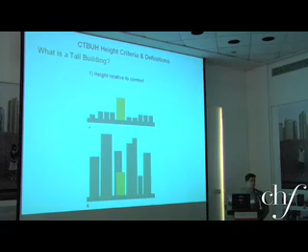And I'll tell you the three things. When I talk about we, I talk about the organization that I'm the executive director of, the Council on Tall Buildings and Urban Habitat, which has been in existence for 40 years and is based here in Chicago at IIT. We consider three aspects when we're looking at what constitutes a tall building. The first is it's not just about height. It's about height relative to context.

In some cases, a 15-story building may not be particularly high in this city, for example, but in suburban areas or in provincial cities in this country and other countries, it is particularly high. So it's not just about height, it's not about feet above ground, it's about height relative to context. The second is proportion.

It's not just about height, but it's also about the size of the building relative to that height. So we can have some towers or buildings which are not particularly high, but they're very slender, and these could be considered tall buildings. I think a good example is just along the river here, the Merchandise Mart, which is an absolutely massive building in mass. And when it was built, it was actually quite tall. But it's not typical of a tall building because its mass is bigger than its height.

And the third criteria that we look at are the technologies that are employed in the tall building itself. If these technologies are specific to tall buildings, it could be elevatoring strategies, it could be wind bracing, then this is another factor that leads us to conclude that the building is a tall building. So, sorry, I should have explained, any building that fulfills any of those three criteria to us could be a tall building.

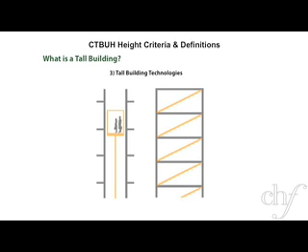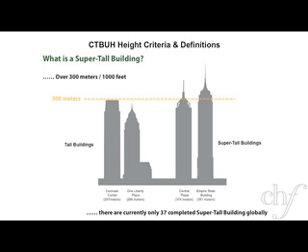What is a supertall building? Very easy. It's not a building that exhibits some element of super tallness. It's a building which is over 300 meters or 1,000 feet in height. So we do nail that down with definitive criteria. And just to put this in context, at this moment in time, there are only 37 buildings in the world that are supertall, that are completed and occupied today, only 37 buildings which are over 1,000 feet in height.

Now, it would be very amiss of me to come here and talk to a Chicago audience about tall buildings, and I can see people smiling in the audience already. One of the things that my organization does, we are the arbiter on tall building height and the body that says which is the world's tallest building or not. And some of you, if not all of you, may remember a situation about 10 or 12 years ago where the title of the world's tallest building was awarded to Petronas Towers in Kuala Lumpur over the Sears Tower.

And although I just want to say for the record that I was not involved in that decision, because I was far too young at that time, I just want to explain some of the reasoning behind that, because I think it's fair to say it surprised us the amount of interest that decision had, both in Chicago and around the world.

The main reason is this. The antennae at the top of the Sears Tower were not included in the height of the building, as opposed to the spires on the top of the Petronas Towers. And the reason for this is that the spires were always considered an integral part of the architectural vision behind that building. So it was never expected that those spires would ever be taken away from the building.

Now, over the past 30 odd years, the antennae on top of the Sears Tower have obviously become synonymous with the iconicness of that building. However, they were there for one reason and one reason only. They're a piece of telecommunications equipment. They were never part of the integral initial architectural idea.

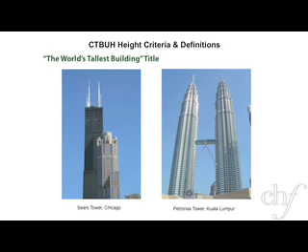And in actual fact, a decade or so ago, there were big discussions involving lots of people about this. When it's linked to technical equipment, of course it can be taken away depending on the changes of technology. So that's why it was not considered in the overall height of the building. You can make your own minds up whether you think that was a good decision or not, but that was the reasoning.

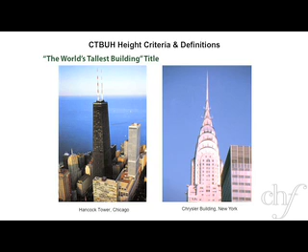And there's another two examples there where, whether you agree with the decision or not, you can see that there is a difference between something like the Chrysler building, where that spire is an integral part of the architectural vision, and something like the Hancock, where it's functional technological equipment which is placed on the roof. Of course, in the 10, 15 years since then, there's been a lot of examples that are not as black and white as the issues I'm showing you today.

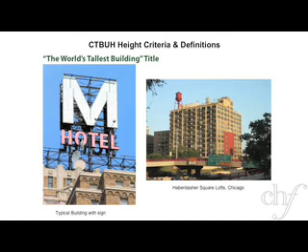But just to extrapolate that, where do you stop? If you do start to count this stuff that's plonked on top of buildings, where do you stop? Signage, water towers, satellite dishes, where do you stop? And so all I want to get across to you today is that there are a lot of factors that were considered in this decision that perhaps on the face of it might not have made sense, because the iconic antennae on top of the Sears were higher than the spire on Petronas.

As a result of that discussion in the mid-90s, we created 4 criteria, although this tended to get overlooked, to reflect the changes that go on at the top of buildings. The first category is the height to architectural top. And it was this category that became the leading category for the tallest building in the world, city or country. However, we created 3 other categories. And by the way, this diagram shows the 5 tallest buildings in this category today, Taipei 101 in Taiwan being the tallest building completed and occupied today.

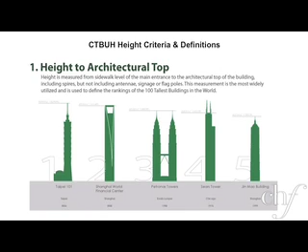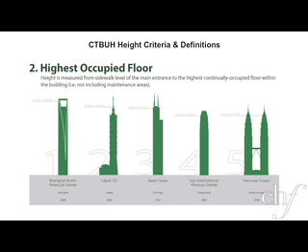The second category was highest occupied floor, i.e. at what height above ground can you put man or woman in a permanent working capacity, permanent access, as opposed to a mechanical room or a lift machine room. And the tallest occupied floor at the moment is the Shanghai World Financial Center, which was completed about 3 months ago in Shanghai. That is an observatory at the top level, which you'll see is significantly above all the other buildings.

The third and least glamorous is height to top of roof. And the fourth, and hopefully this will please a lot of people in the audience, is the height to tip. What this category is recognizing is, irrespective of whether it's signage or antennae or spire or whatever magical thing the architect may say about it, this is measuring man's ability to put material at the highest point above the plane of the earth.

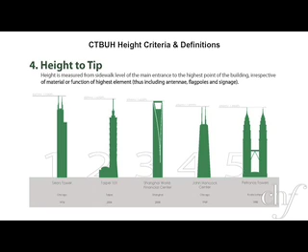And hopefully you'll be pleased to see that the Sears Tower at this moment in time, in terms of buildings, is the highest occupied floor in a completed building. We do make a distinction between buildings and towers. Buildings require people to become buildings, as opposed to telecommunication towers, where the vast majority of the height is actually occupied by non-people directed space, or no space in a lot of cases.

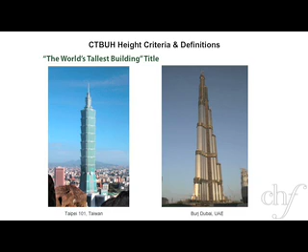So that's the world's current tallest, Taipei 101. The world's current tallest under construction, and not far off completion, is the Burj Dubai. And I'm going to talk a little bit about that in a moment or two. Just to finish on the criteria,

mixed-use buildings. There's a lot of interest around the world in this change, which I'm going to show in a minute, towards mixed-use buildings. And any architects in the room may know that there's a lot of people who put a restaurant at the top of a building and a shop in the bottom and say it's a mixed-use building, which of course it's not. And we define mixed use.

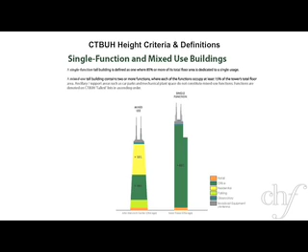For a building to be mixed use, a minimum of 15% of the total floor area needs to be an additional use. So it's 2 or more uses, with any one use being 15% or greater before it can be accurately defined a mixed-use building. And that's the criteria that we use.

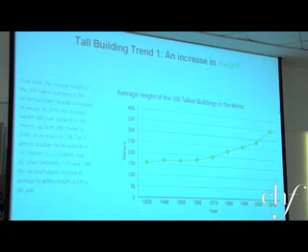Okay, I now want to talk about some of the trends in tall buildings that have occurred in the past 10 to 20 years. First of all, we can say very clearly that there has been a massive increase in height of the world's tallest buildings and tall buildings generally. And this diagram is the average height of the 100 tallest buildings in the world, which you will see going steadily up and up each decade.

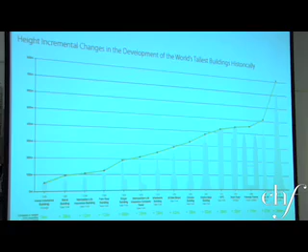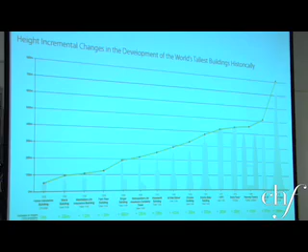And the Burj Dubai will be almost 1,000 feet greater than the Taipei 101. It will be 60% taller than the Taipei 101 building. And you can see it there, and it's not complete yet. And there's a lot of things that are incredible about this building. Just in pure height terms, we could, and of course maybe we shall, have a conversation about whether it's appropriate on sustainability grounds and others.

But in terms of pure height, this is the first time in the history of mankind that the world's tallest building will be predominantly a residential building. Every tallest building in the world has always been an office building. And as you can probably imagine, an office building usually relies on a large floor plate, a large floor area. You know, your typical office, you want to step out of a lift, an elevator, into as big a wide open plan space as possible.

Whereas a residential building is usually a much smaller building because there are less people per floor. It's more cellular spaces. And so the thing about this building is not only its great height, but its slenderness ratio, its proportion. Because for the first time we're seeing this massive height, but we're also seeing a much smaller floor plate as it steps in towards the top, such that it really does look like a needle standing up on the Dubai skyline.

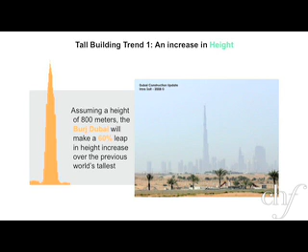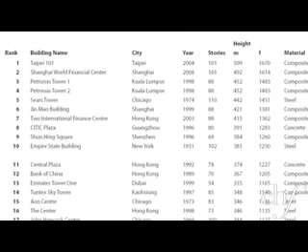This will be the tallest 30 buildings by 2020. These are the ones we know of. So you will see Taipei 101. Sorry, actually, this is before 2020. This is approximately 2012, maybe. But Taipei 101 has now dropped down to 11th on the list.

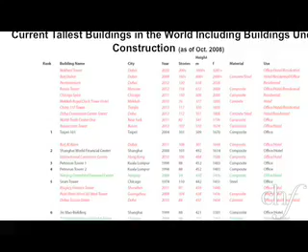It's got the ranking of 1 because it's the tallest now. And the Empire State Building is nowhere to be seen. Nowhere in the top 30. Let me jump to this. This is easier to take in.

This is what we call the tallest 20 in 2020. This will be the tallest 20 buildings in 2020. And these, by the way, we have strict criteria for these. These are what we call real proposals. And by real proposals, we mean there's a site, there's money, there's a developer, there's a full professional team, there's planning consent. This is not just a hypothetical proposal.

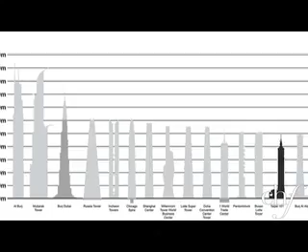That doesn't necessarily mean they will all be built, of course. But the intention is that these are real proposals, and there is a full team currently working it up. And they're often on site. So the Chicago Spire, which I suspect we may mention during this presentation, is also on this list. But the ones in dark color there are the built ones. The ones in light color are out of the ground and are already well on the way.

And the interesting thing is Taipei 101, I think, is going to be 16th on this list, and things like the Empire State Building are nowhere to be seen. So this is the thing. Irrespective of the credit crunch, irrespective of the hundreds of proposals that we see every month that are not on this list, i.e. the hypothetical proposals, we can say quite safely that we are in the midst of a tall building boom, the likes of which the world has never seen, both in great height and in numbers of tall buildings.

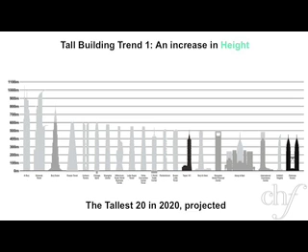The last part of the 19th century in Chicago, there was a great boom in tall buildings. In Art Deco New York and Chicago, there was a resurgence. In other periods in the 80s and 90s in Asia. What has happened in the last 10 years is that there has been a boom across the whole globe. And Lynn and her work at Chicago Architecture Foundation, some of the exhibitions that they've shown, has portrayed that. Everywhere, Australia, Asia, Europe, traditional cities in Europe which have been anti-skyscraper. Some cities in my country like London. Just a few weeks ago, Paris even announced that they're now considering tall buildings built in the historic centre of Paris.

There has been a massive boom in tall buildings. Whether all these are appropriate or not, we will get onto. Great increase in height, a great increase in number. As I've said, there are now more tall buildings in Asia than there are in the whole of North America. Think about that. 40 years, more tall buildings built in the whole of Asia than were built in almost 130 years plus in North America.

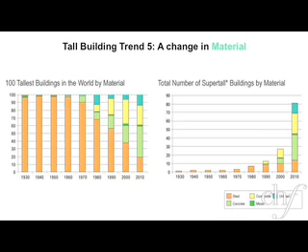He says, and some of you may have heard him say this, if you'd have predicted the world's tallest building 30 years ago, you'd have said three things safely. You'd have said it'll be in North America, it'll be an office building, and it'll be built of steel. And now the exact opposite is true. It'll probably be built in Asia or the Middle East. It'll be residential, and it'll be built of concrete or composite structure.

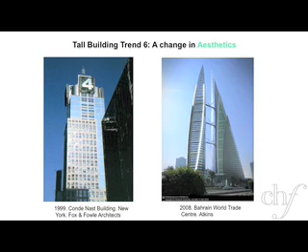And the final trend that we're seeing is this change in aesthetics, and we're going to talk about that in a little while. This change in aesthetics for tall buildings. So what's driving it? Those are the figures. What is driving this? Well, I think there are a lot of drivers, but I pick up on just four here. Some I think which you'll be familiar with, and some perhaps not, just to throw out there my thoughts.

One is land prices, always been a driver of tall buildings. Price of land in the city and the desire from developers and others to exploit to the maximum the price of that land in developing into a tall building. So that's one of the drivers. However, again, the world has changed, and tall buildings have always been used as icons. They've always been icons, and they've always been used by corporations predominantly for prestige.

But something's changed in the past 10, 15 years, and these are no longer just about projecting the prestige of corporations. They're now about projecting the prestige of cities and countries in a global competitive market around the whole world. And you can see it in the titles of the projects. They used to be Chrysler Building, Chicago Tribune Tower, Sears Tower. Often the titles outlive the companies by decades. Sorry, that wasn't meant to be political. But now they're not. They're called Burj Dubai, Taipei 101, Chicago Spire. They've taken on a new agenda.

And the agenda is that these buildings are being used to say, hey, we've arrived. We're a first world country, often for developing countries. And back in the West, these cities are saying, well, we arrived a long time ago. We kind of slept for a while, and now we've arrived again. And city governments and often federal governments buy into this in a big way. They're now about branding cities as much as they are about branding corporations. By the way, I'm not saying this is good or bad at this stage. I've got very strong opinions on this, but I'll let you make up your own minds.

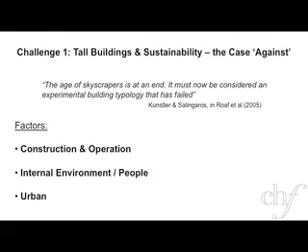Before I tell you about the positive sustainable credentials of tall buildings, let me say there are very strong feelings around the world that in a lot of cases tall buildings are not suitable at all. When I mentioned the Paris thing, there was a visible reaction from the audience, which to me is normal, coming from London and various other places. Certainly we as the council do not advocate saying tall buildings are the answer to everything everywhere. What we're saying is if you're going to do a tall building, you should do it to the best that you can, and that's what I'm going to touch on today. But there are many people who think they're terrible and anti-environmental.

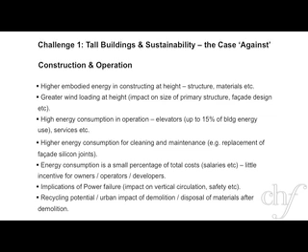The embodied energy, for example, in gathering these materials together and putting them up in the sky just doesn't justify the act of doing it in the first place. And the energy expended in elevators, lighting, and all these things make them anti-environmental. There are usually three areas these people draw on: during construction and operation, the internal environment they create for people, and the impact on the urban realm in terms of overshadowing, right to light, things like that. I'm not going to dwell on this, but there's a whole list I've put together of why tall buildings are anti-environmental, and you can ask me for this later if you want to.

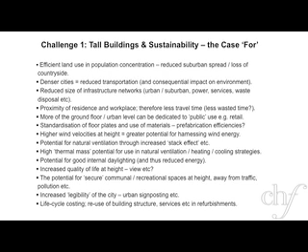However, one thing I do want to touch on is why we at the council believe tall buildings are an important solution for sustainable cities of the future. And rather than dwell on the negative, let's dwell on this.

I think it's generally recognized, and I mean no disrespect here, that the American urban planning system, which the UK has adopted comprehensively, is not the way forward for cities of the future. That is, we'll build a dense downtown core and stick our offices there, but we can all go off and live on a quarter-acre block out in the suburbs. I think most people think that's not the way forward. The loss of greenbelt, the ever-increasing infrastructure, the transport networks—this diagram shows why.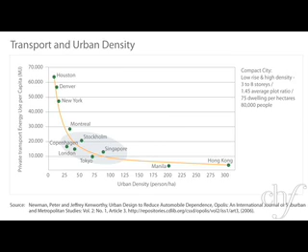Now why is that relevant? Well, that's relevant in countries like China and India and other developing nations seeing millions of people moving from rural to urban every year. Figures have been done to show China needs a new Chicago, something like every 8 months, to house its rural-to-urban migration. Where do these people go? By the way, those figures might not be 100% correct, but the sentiment is correct. So where do these people go—into the American model of a dense downtown working core with an ever-expanding suburb? Or into denser, more sustainable work-living patterns? But it's not just about places like China and India.

Changing social demographics in countries like America and the UK are also a result - by changing social demographics, I mean people are living longer, divorce rate is up, single-family households. In the UK, we need 200,000 new homes every year for the next 10 years to cope with this, not because of increasing population growth, which is more or less static, but because of the increased homes that are needed.

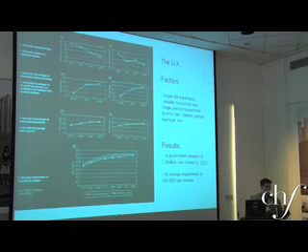Where do these homes go? That's one of the things that we're advocating: denser cities, which doesn't necessarily mean tall buildings, but tall buildings can be one part of the solution. One thing we feel quite passionately about is that tall buildings have an opportunity to show the way for the greater good of the built environment as a whole.

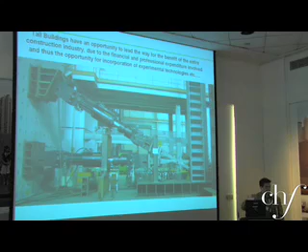This slide, though it might seem a bit obscure, shows that. It's a testing rig put up to test one piece of structure for a building in South Korea - a piece of structure that was probably going to be repeated 500 times in the building. Because of the size of a tall building, it has both an economic and a professional investment in it, which allows it to embrace experimental sustainable technologies and testing that smaller buildings don't have.

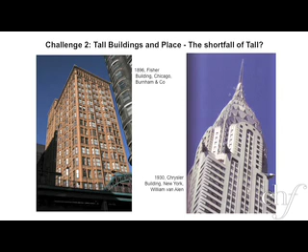Now this is where I start to get really passionate, because this is the second challenge of tall buildings - what I call tall buildings and place, the shortfall of tall. I often start my presentations here with a statement I hope nobody will be offended by: I actually think that 99% of tall buildings around the world are really poor pieces of design. And I'll tell you why - because they follow one of two design approaches.

They're usually the vertical extrapolation of an efficient floor plan, i.e. the commercial model, or they are designed as a piece of sculpture to be beheld in the city, much as you'd design a piece of sculpture to sit on a mantelpiece or a table - this iconic approach. And although the iconic approach can lead to more interesting tall buildings, the problem is this.

When the relationship between a tall building and the city is purely a visual one - i.e. I'm here, I'm beautiful, look at me - then that building can be picked up and plonked anywhere around the world. And what architecture generally, but tall buildings specifically, are doing is homogenizing world culture. Cities are now getting more and more like each other because they're gauged through a series of imported icons.

This is something I feel strongly about, as an architect but also as someone passionate about foreign culture. I've lived and worked all around the world, traveled in 50 or so countries. I travel to countries because I'm interested in the differences between places, not the similarities.

And it offends me when I see tall building competitions pop up in, let's say, Chicago, and a tall building is unsuccessful, and then I see the same building pop up in Moscow, or Dubai, or Sydney, or London. I think architecture has got to be more than that.

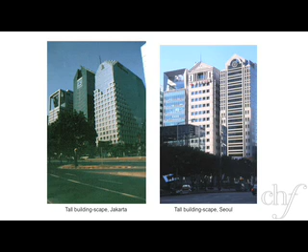And in the cities that I've lived and worked out in Southeast Asia, this is how it translates. Air-conditioned rectilinear boxes, 99% of tall buildings, with some fun and games at the top and fun and games at the bottom. The building on the right-hand side, actually, better image, Bangkok. I lived in Bangkok for 2 years.

What has postmodern architecture, with a root back to, I guess, somewhere along the way, the heart of Greece or Rome, got to do with Thailand? I find this extremely offensive, but believe me, this is a large part of the normal tall buildings that are built out in Asia and other places.

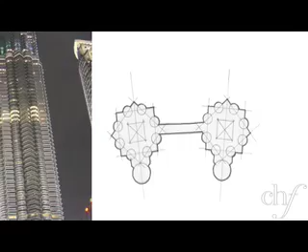Now, Cesar Pelli, who designed this building, was inspired by Islamic geometry in the plan form, and that's why I show the plan form on the right-hand side, the Islamic star. But then he extruded what I think is mostly a Western tower from this Islamic plan form.

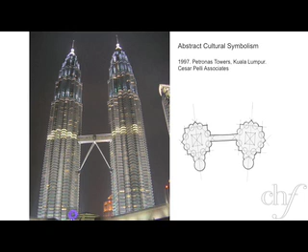It's still that same language of steel and glass. And ironically, just a couple of miles from this building is another building which is inspired by exactly the same plan form, but designed by a local architect. So it's the same plan form. But the architect didn't stop with the plan, because nobody understands a building in plan. You understand how it looks and how you move through the spaces. You don't understand it as a two-dimensional drawing.

What the architect did was extrapolate into three dimensions and carry on this Islamic tradition where the materials were used to create this brise soleil, or fretwork, on the outside of the building, which also shielded the curtain wall, which was then set back in from the skin of the building. I think this is an excellent example of what I would call a vernacular skyscraper, a building that is born of its place. So I just want to chart briefly what I call the rise of an environmental conscience. Buildings that are responding to environment and place.

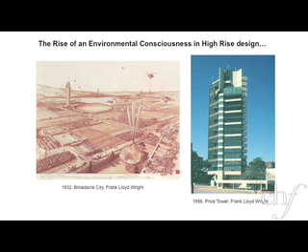And you know, we could start anywhere, but I start with Frank Lloyd Wright. This building was pretty much a disaster in any other way than aesthetic. And you know, Frank Lloyd Wright is a hero of mine. I live in the heart of Oak Park. I can see six Frank Lloyd Wright houses from my windows. This was his only real tall building, and it was a disaster in many respects in terms of its functionality. It mixed office and residential on each floor in a relatively small floor plate.

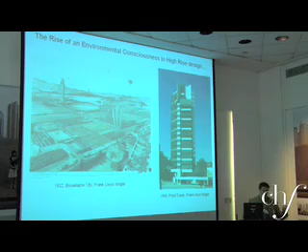But for me, it was interesting because Frank Lloyd Wright didn't believe that the skyscraper belonged in the city at all. He believed that they belonged out in the suburbs where they could be beheld, where they could be beautiful objects. But another point behind his rationale was, rather than go for this suburban model of everyone living on a quarter-acre block, put them up in higher-rise towers so that we can preserve the land. Now, there are obvious social connotations to that, but it was an interesting approach. So that's why I start here.

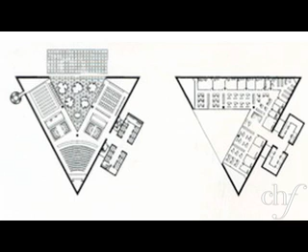Because this is a building which shields the sun through this stone facade and inverts the curtain wall, the glazing, to the inside through a series of sky gardens which step up, which hopefully you can see in plan there. These are a series of sky gardens, and this is the glazed facade, so people still get this view out, whereas the outside of the building is predominantly stone.

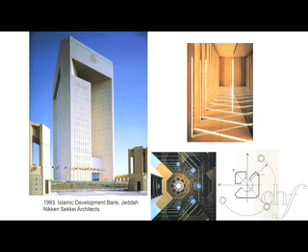I think there are lots of great examples in the Middle East of tall buildings that are not just constructed in stone. And I'm going to speed up a little bit because I want to show you something else towards the end here. But there are others that have done it. Harry Seidler in Australia, Charles Correa in India, that are trying to create something which is really born of place.

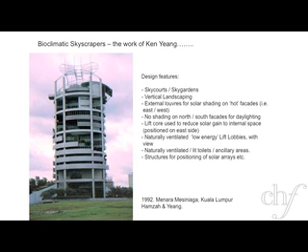And probably my biggest hero is an architect called Ken Yeang. Obviously someone's aware of Ken Yeang. Ken Yeang is a Malaysian architect, and I'm very pleased to say a friend of mine as well. And for the past 30 years, he's been doing what everybody else has been talking about in the past 5-10 years, developing green skyscrapers. And there's two people that have really been doing it, Ken Yeang and Norman Foster. Norman Foster has also done some excellent tall buildings, but there's a major difference between the two.

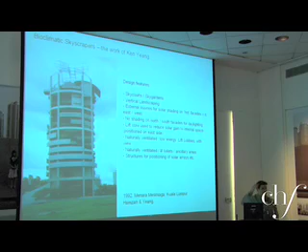Norman Foster's palette of work is still that high-tech, modernist ideal of steel and glass, whereas Ken Yeang has really striven to create buildings which create a new aesthetic. And that's really the thing that I'm most passionate about. This situation that we're in with climate change, we've got an opportunity to create tall buildings that are born of our age, that look different to the last 50 years of steel and glass. And that's what I'm passionate about.

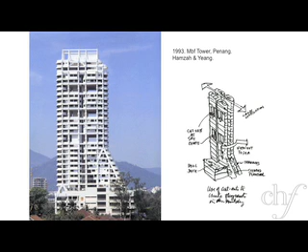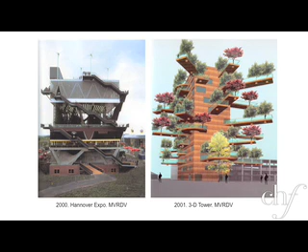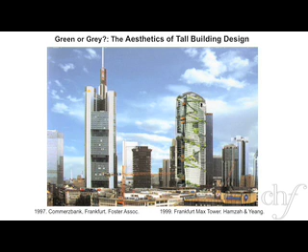How far do we go? I'm going to breeze through this, but this is Norman Foster on the left here, the Commerzbank in Frankfurt, and Ken Yeang on the right. And I kind of like this. This, for me, typifies where we're at, this green or grey. What is the aesthetics of the future tall building? Is it Ken Yeang? Is it green? Or is it Norman Foster? Is it grey? And Norman Foster has built some excellent tall buildings, probably better than anybody else. Quality of internal space, the sustainable aesthetics.

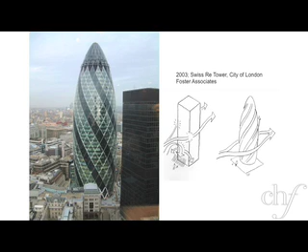But look at this. This is the Swiss Re Tower in London, again, city in my country. Is this the best tall building in the UK? Probably. But is it really an eco tower? Because if it's an eco tower, why is it the same through 360 degrees? Because the sun isn't the same through 360 degrees, and the wind isn't, and the city certainly isn't. So architects tend towards, I can't think of another word, so I'll say bullshit, and I'm sorry if that offends anybody, but they do.

And I think there are great environmental aspects to this building, but it's essentially been designed as a piece of sculpture to be beheld. And I think it would be a lot more useful if architects would just say that. I'm not saying that buildings shouldn't be sculpture and shouldn't be beautiful, but there are certain things that should override it. And I think a true environmental tower shouldn't be the same all the way around, shouldn't be designed as a single object like that. You could say a similar thing about Hearst Tower.

It's extremely brave. The client and the developer and the architect, for the greater good of humanity, are willing to invest in three massive wind turbines to test whether it is good to harness wind at height, which people think it is, but the jury's still out on whether it's better to put them on the top of tall buildings or to collect them and put them all in offshore farms. The verdict's still out on this. So I think we need to support these projects. I'm just talking about the aesthetics.

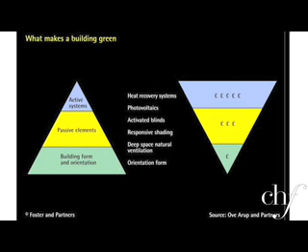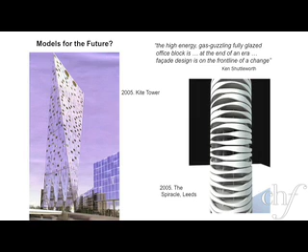And the final thing I want to show you is some of the work that I've done with my students. And I take a deep breath and advise you to do similar. But this diagram's interesting. What this diagram shows is that technologies are often used to correct problems that didn't need to be there in the first place. And if you're designing a true environmental tower, you've got to get the fundamentals right. These are not by me and my students, by the way, but these are some models which interest me because they're moving away from all glass towers. If you're going to move away from an all glass tower, then what kind of language could you expect?

And I ask you, is that the best we can do as architects? I think that's atrocious as a starting point for architectural design. Not about the city, not about people, not about place, not about anything but this corporate entity logo. And would you ever know that looking at the building? It wouldn't be so bad if you knew it. Yeah, well, maybe bad, but at least there would be some result. But it's just a little bit of a game which nobody even knows anyway.

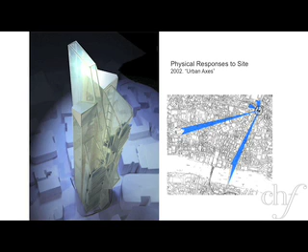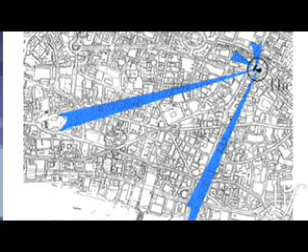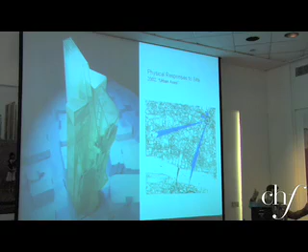Okay, one of the main differences between a tall building and a small building is this. A small building only has a visual relationship with the city or the site in its direct context, around the base of it. Whereas a tall building, as it starts to rise up in the city, starts to potentially get a relationship with places far and wide in the city. And I believe this can become a starting point for manipulating the mass and form and expression and skin of the building. So there may be important places, urban parks, or the view from a bridge, where the building can start to set up a dialogue with other buildings and other places in the city.

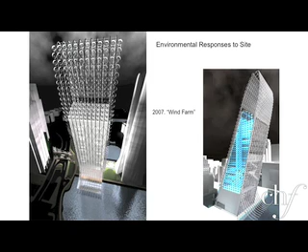If you are going to harness wind in tall buildings, then what's the best way to do it? Is it 3 big turbines? Or is it what we call here a wind farm? And by the way, this is me and a student at IIT. So there's not a great amount of detail behind these. I can't show you full working drawings. They're just ideas that are exploring what the possible future is. All these designs have a lot of ideas in them. For example, this leans in towards the south to cut down the angle of incidence of sun hitting the facade.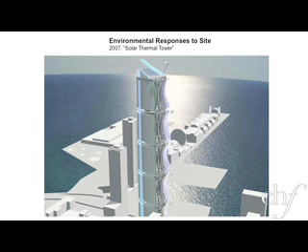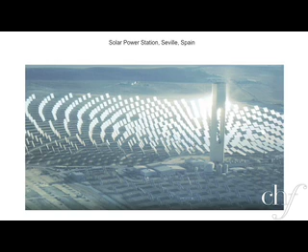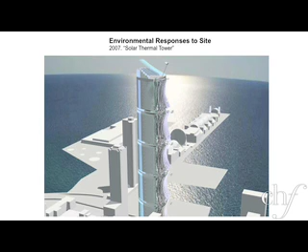This is a project, some of these are in Chicago, by the way, which takes this technology which a lot of people believe is the way forward. It's not about putting photovoltaics on buildings anymore. It's about solar thermal power plants, which you see here in Seville, and I think one's just been constructed in California or Texas or somewhere, which is about concentrating sunlight onto a receiver and taking that energy and storing it through raising liquid into steam and powering a generator and various other things. So we took that technology to see if it could be applied to a tall building. Again, it's an agenda which is born of place. In this case, it might seem bigger with climate change, but it's born of that place. Is it possible to do that?

This is a project which we call the Chicago Aquifer. Water is the next oil in terms of crisis. There are projects in this city that tout quite heavily that they have rainwater recycling systems on the roof. Well, I hate to tell you this, but the roof of a tall building is negligible because rain doesn't fall down vertically. It's driven by wind. So rain doesn't do that, it does that. And if you're serious about capturing rainwater, then really it should be about the facade, not the roof. The roof is tiny. It's the facade which is the big thing.

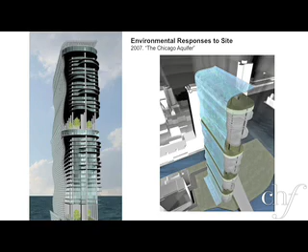So this project placed itself perpendicular to the predominant wind direction so it could capture 160% of rainwater falling on the site. How 160%? Well, it captures it from its site and the site adjoining. And then the facade becomes a device for capturing the rainwater and bringing it back into the building for usage. There were other things going on. It took water out of the lake and purified that. There were living machines in the building. Does this seem absolutely nonsensical and silly?

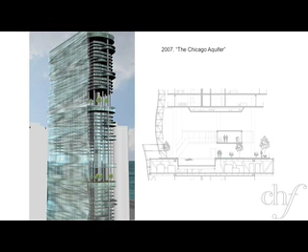Well, at the moment, perhaps. But when we've got no water, absolutely no water, things like these might become, and having to capture every square millimetre of it, square inch of it, it might become more sensible.

One of the things I'm passionate about, why are all tall buildings either office, hotel, or residential? Is that the best we can do? In our future cities, is that the best we can do? Because cities are made up of more than that. We've got to introduce non-traditional functions into tall buildings. And not only that, we've got to do one thing and make it count for three.

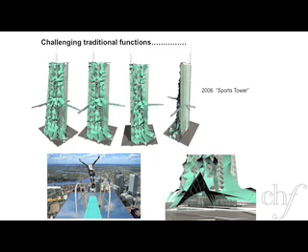So this is a tower which combines office and sports facilities. And this skin on the outside of the building is there to shield from the predominant southerly sun, but it's also, and I smile as I say this, a national centre of excellence for rock climbing. You do one thing, you make it count for three, because otherwise you've got to build your artificial rock climbing place somewhere else and transport people to get there. And could you imagine being sat in your office and seeing people climb past the windows?

At the top of tall buildings, we have a tendency to put what are called mass tuned dampers or liquid tuned dampers. It's quite technical, but could we put a liquid tuned damper at the top of a building and use it as a swimming pool? If there are any structural engineers in the audience, they're instantly going to tell me no. But this is what we're doing at IIT. We're trying to just push the boundaries on what is possible.

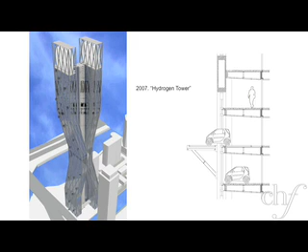Oh, you might not be ready for this one. This is the hydrogen tower. Part of the problem with tall buildings is where do you handle the car parking? I mean, the whole issue of car parking, the whole issue of cars in the city. So these cars were powered by hydrogen, but the problem at the base of a tall building when you put the car park there is it disconnects the tall building from the city.

So what we actually looked at here was moving the cars up and down the facade in a carbon neutral way through use of hydrogen, and still fitting in with that suburban American ideal of being able to park your car on the driveway within a double skin inhabited facade.

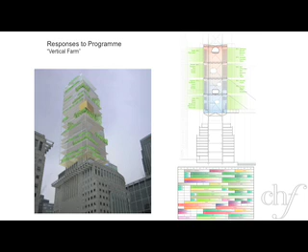This is a serious one. I mean, they're all serious actually as ideas, but this is a serious one. This is a vertical farm. It's completely nonsensical that we keep importing and exporting foodstuffs all around the world, with the food miles, the energy implications. So this was a project which built basically a big greenhouse on top of an existing building.

And let me tell you, there are a lot of people who think this is a really good idea because it's protected, it's inside, you build it out of a material called ETFE, which is light, you wouldn't build it out of glass. It's grown through a system called hydroponics. It's not soil, because you don't want soil up there because it's too heavy. It's free from pestilence, it's free from weather cyclones. You can do it all the year round. There's people doing a lot of research into this, and it's giving the food source where you want it in the city.

And the final project I want to show you picks up on that and takes Mayor Daley's idea of the green roof. Now, the green roof is excellent, and I think Chicago well deserves its moniker as having more green roofs than any city in the world. Great. And the green roofs reduce the heat island effect. They insulate the building. They create a recreational space. But what would happen if we started to link these green roofs up and actually create a green network in the city? And this introduces the final thing I want to say to you, which is one of my passions, which is sky bridges.

As we make the push to denser, taller cities, it seems completely nonsensical to me that the ground floor, the pavement, the sidewalk, is the only plane of physical connection. We're going taller and denser, and we need to start introducing sidewalks into the sky. And once we start to do that, it will change the whole dynamic of buildings. They'll have to start to talk to each other, to be designed together. It'll bring people up to the higher levels, where we can get public facilities at higher levels as well as ground levels.

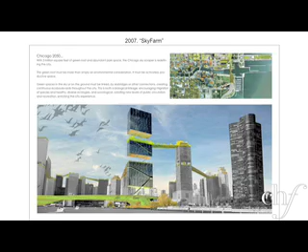And this project looked to do that by linking up these green roofs, and the tall building became an interface for bringing that down to the ground. So this became a circulatory network within the city, a recreational network, but also a produce network for produce to be grown. You know, there could even be sheep and cows and goats up there.

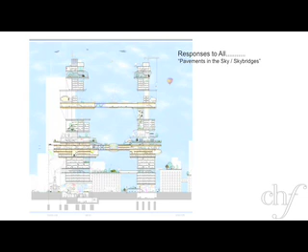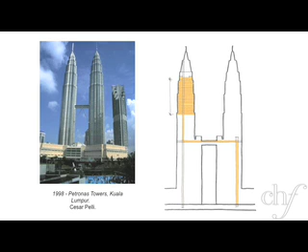Now, in the light of 9/11, that's a whole debate we could have. But you know, one fire stair from each tower is a hell of a lot of floor area and a hell of a lot of money. The ideas between connected cities go back at least 120 years. Every science fiction film that you see, because of these people creating cities in the future, it seems sensical to have them connected.

And Minneapolis is a good one. I haven't quite finished a PhD, but my PhD is on sky bridges, and Minneapolis is one to study. It's the opposite of Hong Kong. Hong Kong, you can get up on an elevated network and walk for 4, 5, 6 square miles without touching the ground. Same in Minneapolis and some of the cold northern cities, with Hong Kong and the hot. These are conditioned spaces.

So, final slide. 7 design principles for future tall buildings. This is what I'm advocating with my students and anyone else who'll listen. Tall buildings should vary with height. They shouldn't be just vertical extrusions of an efficient floor plan. The texture and scale of the tall building should vary with height as well.

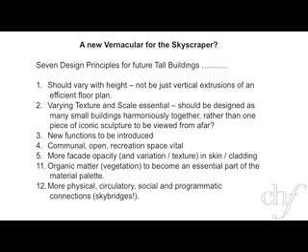I think we've got to stop building all glass towers, wherever, but especially in the Middle East and in the desert. You know, I think the aesthetics of tall buildings have not moved on for 50 years. I think organic matter and vegetation needs to become an essential part of the material palette. And I think we need more physical, circulatory, social, and programmatic connections between buildings. There needs to be more connectivity between the buildings, not designed as standalone single pieces.